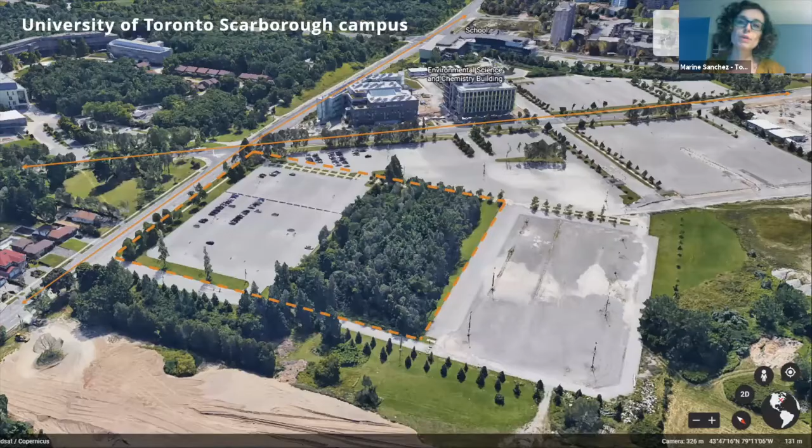Pretty cool. Giving you a bit of the program before diving in: this is a 9-story building. We have a small basement with a few amenities. Level 1 is completely defined as a communal space, and the main key in there is the kitchen and servery area.

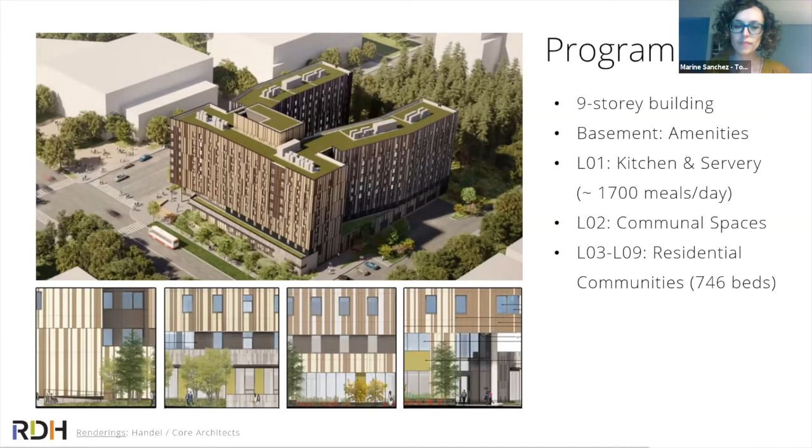One final thing before diving into the detail: we are working with a pretty fun or unusual procurement method where we had a compliance team taking the design to 100% DD. That's a lot of details already, as you all know with Passive House. Shout out to the compliance team led by Handel and Core Architects with Integral, Stephen Winter, RWDI, and Jablonski on the compliance team.

But this team had to hand over the design to a contractor team, to a design-build team, led by Pomerleau, a contractor from Quebec. Our role on this project is to be the passive house and building enclosure consultants to that design-build team, and we get to work alongside IBI again, MCW for mechanical, and EXP for structural. So you can see a lot of cool people to work with, but there's enough of that project to go around, so don't worry, it's all good.

Okay, so with that bit of introduction, let's dive into the details. So how do we detail a large project and how do we make it go across the finish line smoothly?

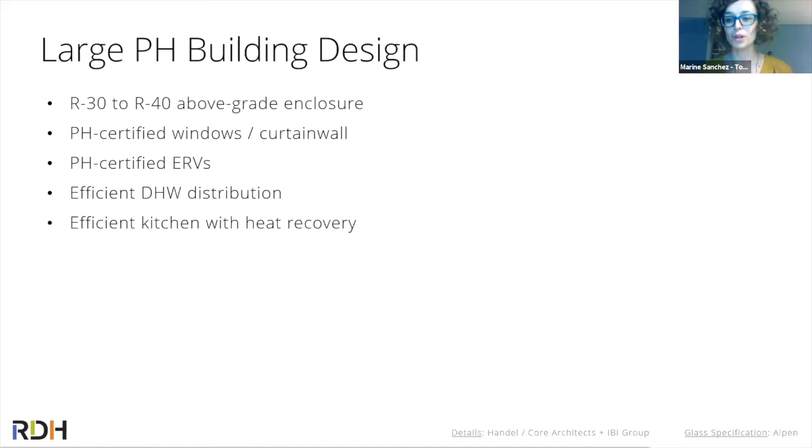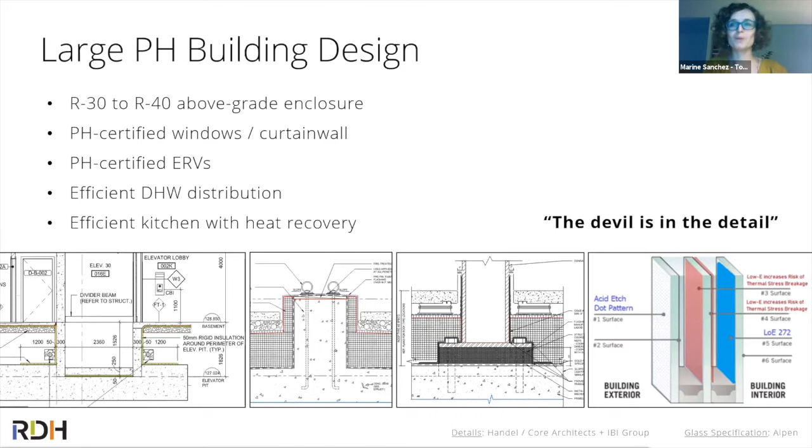However, diving slowly into all the details, we started to realize that this is definitely a good starting point, but the design doesn't finish just there. We found a lot of little things, and that's what I'm going to dive into right now, starting with the below grade, which is literally what is happening or will be happening on site really, really soon.

We are always asking for that continuous layer of insulation to be everywhere. But when we start digging in and seeing what is exactly happening in our basement, you can see that, for example, the elevator pits start being a bit difficult because we have the wrong ground conditions, which means that we can't wrap at least the sides of the elevator pits here all the way further down to mitigate the thermal bridge. So not perfect, not quite optimal. We're like, okay, we'll take that small hit there.

Then we started realizing, oh, we also have a few sump pits hidden here and there. Let me dig them in to see exactly where they are. And they started adding up one after the other until we finally caught them all. You know, it blew everybody's mind to ask for a fully insulated and airtight sump pit, which has never been done before, at least not with this contractor team.

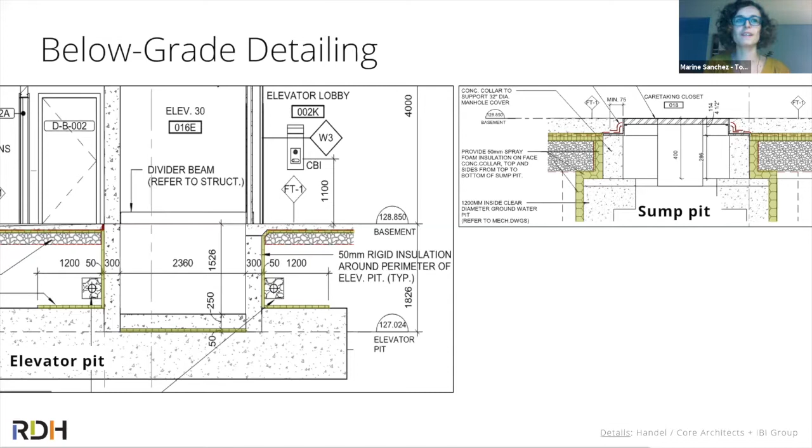And then same thing again with the below grade detailing, right? We're starting to look at every single perimeter detail. That below ground to above ground detail is fairly critical, where we need that insulation all around. And then similarly with the structure that is within the footprint of the building, where again, we're gonna start insulating.

Anecdote aside, I had another team meeting today, and again we get asked, are you sure this insulation makes a difference? And time and again we're like, yeah, trust me, I've played with the model, I know what I'm doing, we really got to do this. But it's okay, I'm glad that we're discussing this and agreeing that that's the right thing to do.

So that's a below grade detailing. You can see that we were supposed to have a continuous layer of insulation, and then it turns a little bit into Swiss cheese between the structure and other things. So taking a bit of a hit every single time, which is not optimal.

Now, moving on to the exact opposite. If you start looking at the roof, the same thing happens again. We want that perfect continuous insulation layer, right? High performance buildings have to be like onions, right? You need all these layers of continuous tightness, insulation, all of them not interacting with each other. And yet this is what we got to work with.

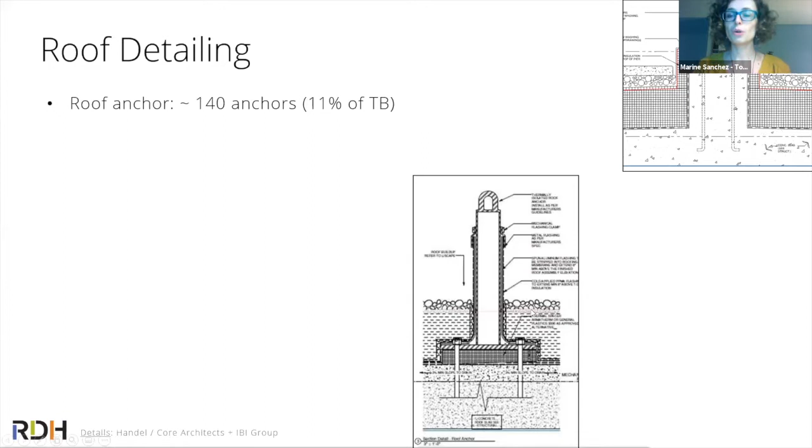Roof anchors, we didn't think too much about them to start with. And then with a building this size, we started counting them all the way till 140. So this is 140 connection points with the roof anchors, which weren't greatly detailed to start with. You can see this is a bit of a significant thermal bridge, turned to, you know, a better detail with IBI.

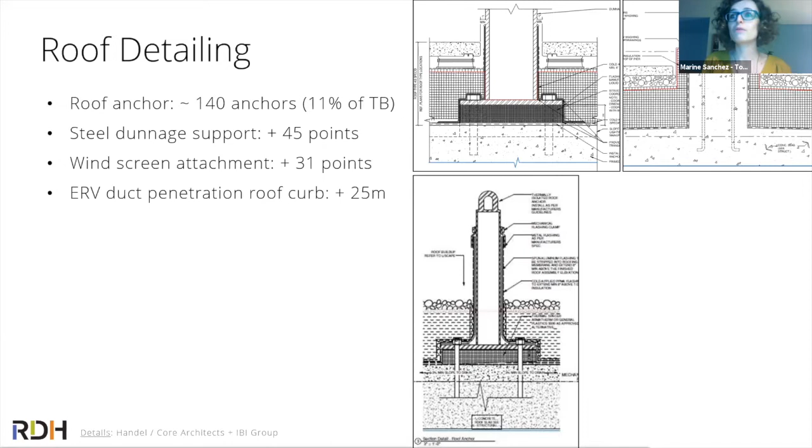Same thing again, steel dunnage support. You know, all these pieces that are supporting all the HVAC kit on the roof, they started adding another 45 connection points. And then the windscreen attachment, same thing again, we have a terrace on which people need to be, you know, safely on, plus 31. Then ERV duct penetration, right? Every time we get the ERV ductwork going through the roof, we're actually having small concrete roof curbs that are hanging up.

And then I'm not even discussing about the soil vent pipes that go through the roof as well, the rainwater leaders as well. So it starts being a bit demanding in that continuity and insulation. For sure, you're maintaining most of it, but that small derating will have an impact thermally, and it keeps adding up. But what is key to remember is that at the end of the day, the best design doesn't matter if it doesn't get implemented, right?

Like our job here is not only to design perfectly, but to get these buildings out of the ground and not keep on locking carbon. So when you think about insulation, that detailing around air tightness, the waterproofing membrane as well, that has to go all the way above all these thermally broken pads and all around all the anchors, we are asking - like, this is a tough job for the guys to do that on site.

So this is not perfect. We're working hard to find alternative solutions that are completely thermal bridge free and sit on top of a roof insulation, but between different code issues and other constraints on the project, we don't always get to do this. So, work in progress. Hopefully we get to minimize this as far as we can.

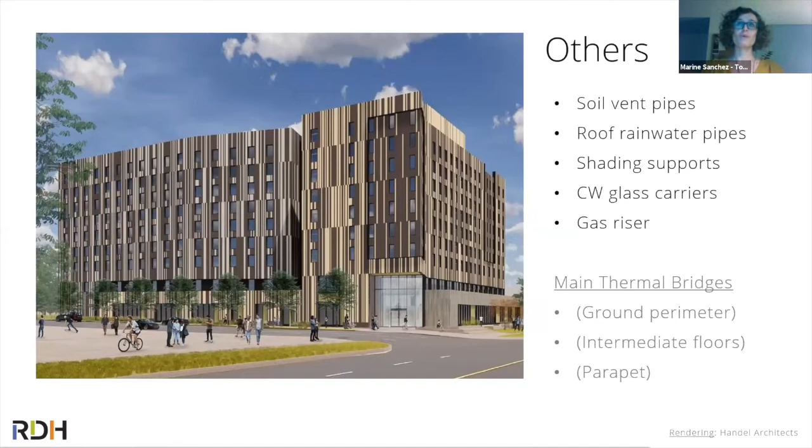Now, as Monty mentioned, we're going to be the ones supporting Pomelo while on site getting that thing built. There's an interesting aspect around procurement as well. Okay, so first thing first.

That might make a lot of people laugh, but time and time again this keeps happening - and this is not because I'm French. There's a whole way to describe what we're after between the passive house person and the rest of the design team, be it the architect, the mechanical engineer, the contractor, the trades, absolutely everybody. There needs to be a clear understanding of what we're after just to maintain that performance from A till Z. This is absolutely crucial to get us through the finish line with the level of performance we were expecting.

So one thing I want to highlight is there's a huge communication effort to happen with the design team. And I have to say, we're being very lucky to work with this team - most of them have done passive house before. It is a smooth ride.

But for Pomelo, for the contractor, this is their first time. And what's really important is for them and the sub-trades to have a clear understanding of what matters. By that I don't mean the exact product, because passive house isn't tied to exact products per se, but to translate what are the performance targets hidden behind the detailing or the products being specified, so that when they come in with product substitutions or alternative ways to build, they can bring an informed design to the table and help us do this better.

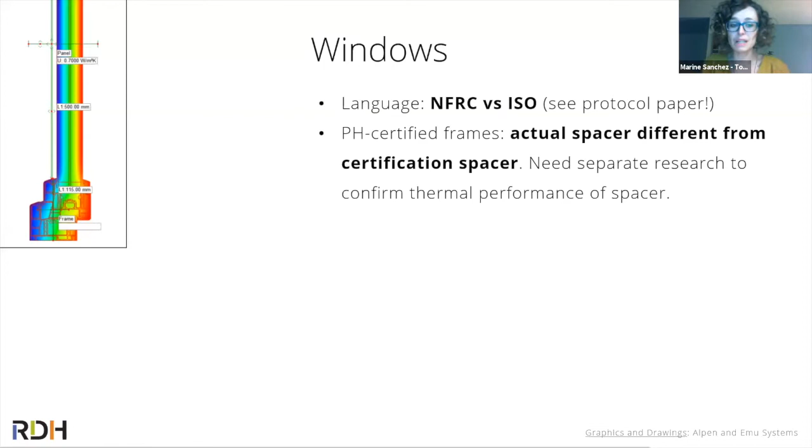This has happened on other projects - UVic and UBCO and other student residences we're working on as well. And that puts us in a difficult position when these changes are last minute, because obviously the margin we get into the model disappears with time.

Bird-friendly glass as well. I thought I had a great glass spec, easy. Then we realized that for the Toronto Green Standard, we have to work with bird-friendly glass. Totally okay, the right thing to do. However, my 0.55 watt per square meter per Kelvin center of glass U value got very easily transferred to a 0.88 on the first quote, where I was like, we're not going to be friends. You might want to take your pencil and try this thing again.

After a bit of discussion, bouncing ideas around to sort it out, we managed to find a clever way. As you can see on the drawing, you do need that pattern for the birds on surface number one, the external surface, but that has a domino effect on where you can put the low-E coatings that get you that great center of glass U value. That knock-on effect of adding the frit pattern led me to spaces I didn't want to go to, before going back to 0.56 watt per square meter per Kelvin. Okay, I can live with that. Let me work on my model.

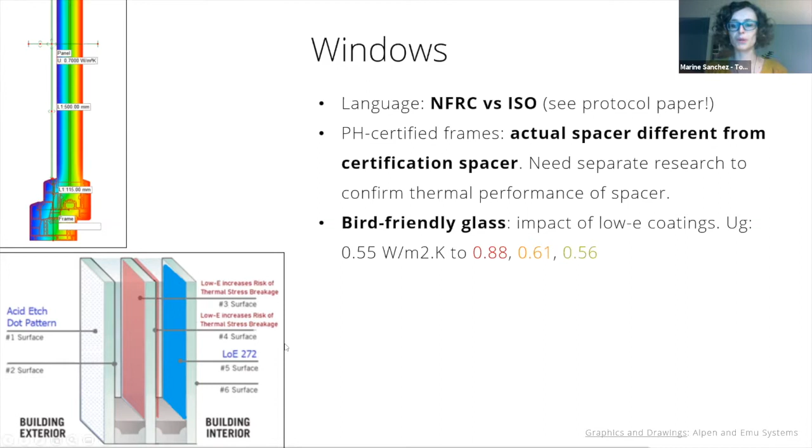Large sizes as well. At early stages, we don't necessarily talk directly with the manufacturer to ask what is the biggest operable window I can have before we start needing extra support. So same thing again, we got the certified frame. I was all happy, reviewed the first submittal, and half of my frames had terrible frame thermal performance. I asked a few more questions and realized there's still steel in there - we can't give it to you that big without this. So again, with a bit of massaging and workaround, we didn't have to change the design, but it was a bit of a process with the manufacturers to get back to a minimal amount of frames needing that steel support, which moves the frame performance from 0.76 to 1 watt per square meter per Kelvin.

And finally, curtain wall - it's not much, but that little point thermal bridge, times two per panel, times the number of panels on these large buildings, adds up to quite a bit, especially if they might not be thermally broken, or rather, non-conductive glass carriers. So you might want to keep that in mind.

So in summary, when we're detailing large buildings, you already know the key formula, right? You already know the starting point. We need a great enclosure and we need a performing HVAC system to back it up. However, I would urge anybody working on a slightly bigger project to keep an eye from the very beginning, maybe not on detailed design, but on the strategies being used, because all of these small items start adding up fairly significantly on this project.

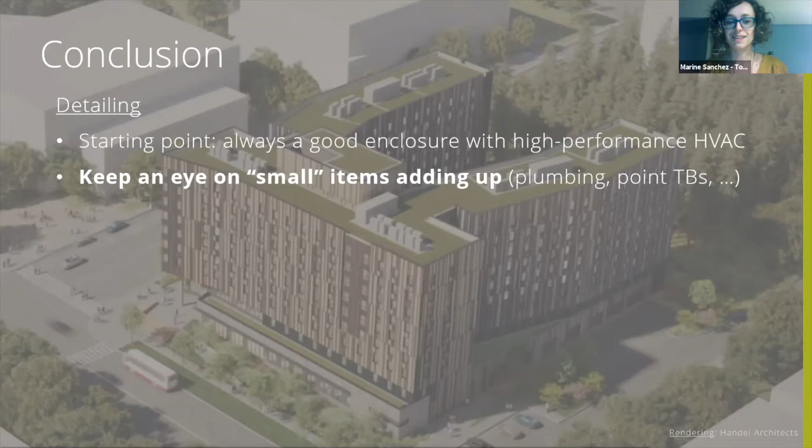Secondly, if we look at procurement, it's absolutely key to be able to extract, in a language that everybody can understand, these performance targets for the contractor and all the trades working there, so that communication channels are wide open. And then that attention to detail that I cannot emphasize enough, because we've got to start delivering what is on the drawings, not just how we did it for the last 30 years. That attention to detail is absolutely critical to get us through the finish line.

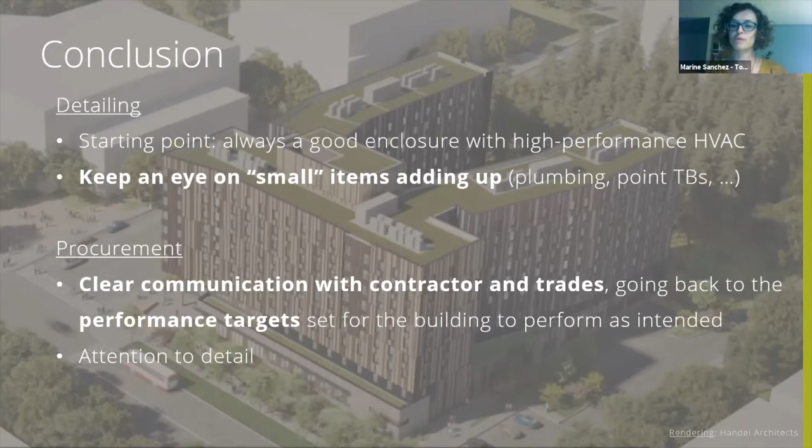There you go, that's what I got for you tonight.

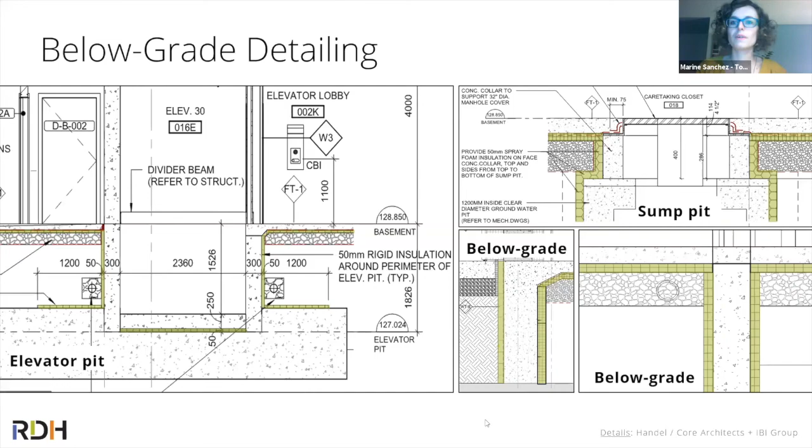So this is the slide. We do have all these pads here for all the penetrations that we have. They are definitely playing a big role, because without them, you would have a highly conductive material going all the way from inside to outside. But despite the fact that we do have them here, they don't make the detail thermal bridge free. They minimize it to a certain extent, but you still get a small allowance, because that psi value or chi value that we have with that point thermal bridge is nowhere near 0.00 something.

Definitely use them, but they don't take you all the way to the magic land where you don't have to account for them. I see. Thank you. No problem.

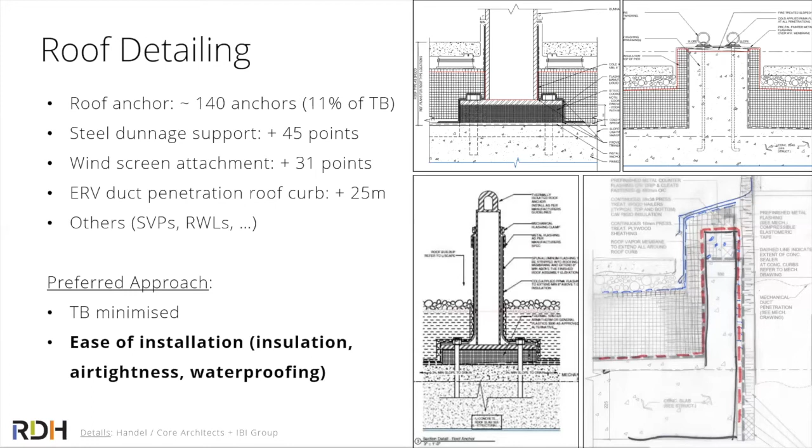a lot of federal projects where bullet resistant and blast resistant glass is needed. Does the same sort of issues that you ran into for bird resistance come up for those? I'm not 100% sure, I'm going to be honest - I'm not a complete window guru, but my gut feeling is that if you're not impacting the surfaces on top of your glass, you're just changing the glass itself. I believe it should be okay, but it's definitely a question worth asking straight away with your preferred manufacturer, because it's not as if we're asking them to do anything new.

They all work with the same glass manufacturers, be it Guardian or Saint-Gobain or others like Cardinal. So we already know the key players, we know what they're able to do. Asking that question early will give you the peace of mind that you're not going to find a bad surprise later on down the line. Okay, thank you.

Roberto made a comment, and since he's coming in from Darmstadt, I figured he should come on and ask it, and then we can all give him a huge applause for staying up so late. I wanted to see the dark eyes. Exactly, he doesn't have video on his computer. Too bad. Roberto, do you have actually a mic at least? Yes, I have no camera in my laptop. So we're not seeing all the beers stacked up in front of you because you've been having happy hour for 8 hours - that's what you're telling us.

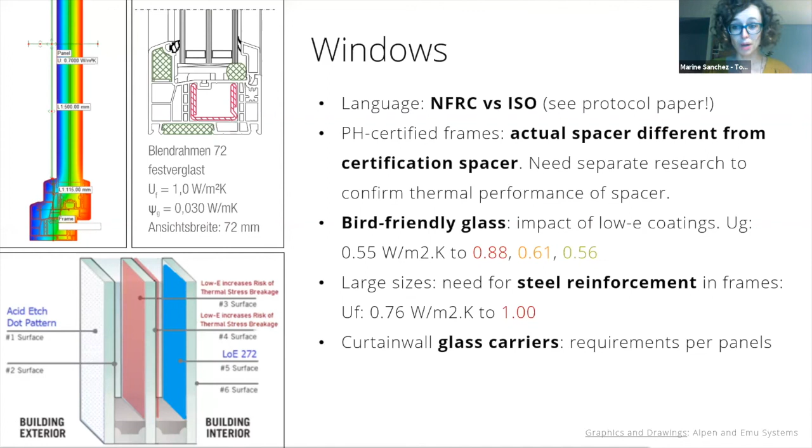And by the way, despite being typical for the number of meals we are doing on that project, it still has a total price tag of between 500 to 600 kilowatt hours per square meter per year. So I hope you were sitting down, because we clearly need state-of-the-art kitchens, because this is already too much energy consumption for my heart to handle.

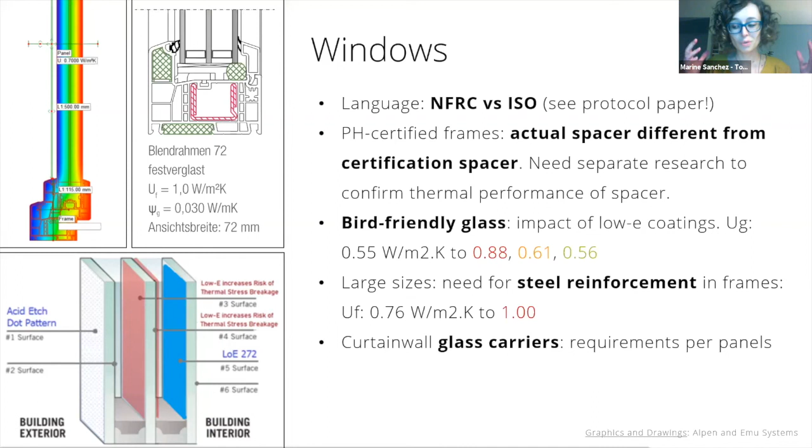I do not see these figures on a daily basis, and this is state-of-the-art, so I don't even want to think about what we normally tend to deliver on other projects. But there are tools out there, you can do it.